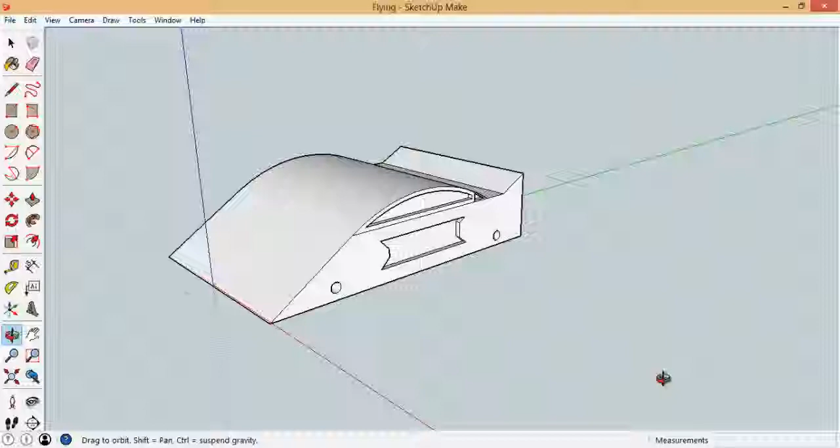If you've put your car together a little too early and you're not quite done with all the details, it's best to actually chop it back in half so you only have to do one side. Then once you're done you can copy the two halves together.

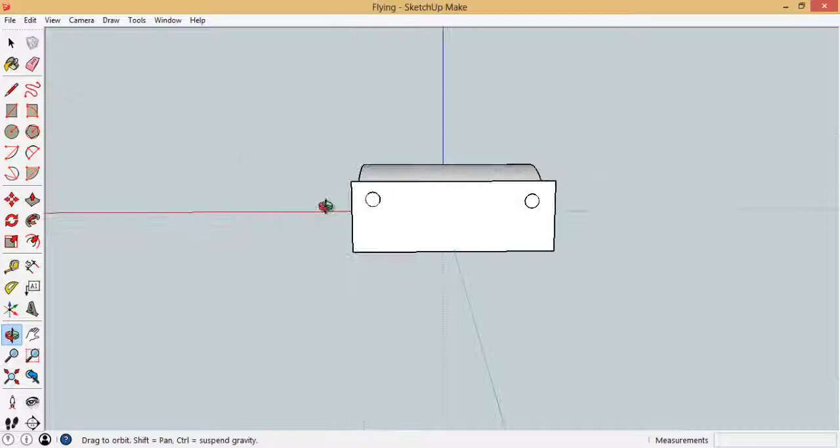So if I ask you to chop your car, here's what you need to do. Start with the line tool and find the midpoint on the front or the back of the car, it doesn't really matter, and draw a line going straight up. This is blue on the blue axis, meaning I'm going straight up and down.

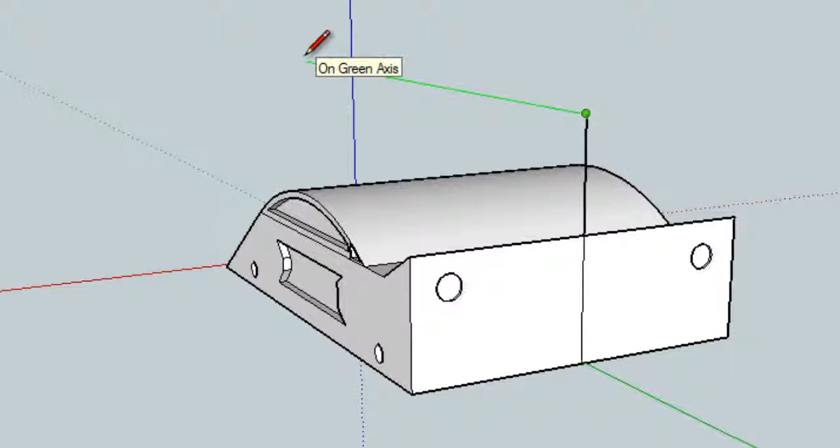Then draw a line going forward or back depending on wherever you started. This should be on the green axis, so you want to see a green line. If you want the line to snap to a certain location, you can show SketchUp where you want that to be by orbiting over and setting the mouse right where you want it to go.

I actually want this to go to the midpoint of the front of the car. Now as I pull the line up, when I get there it says 'from point.' So I showed the computer where I want it to go, and that way it's going to line up with that spot.

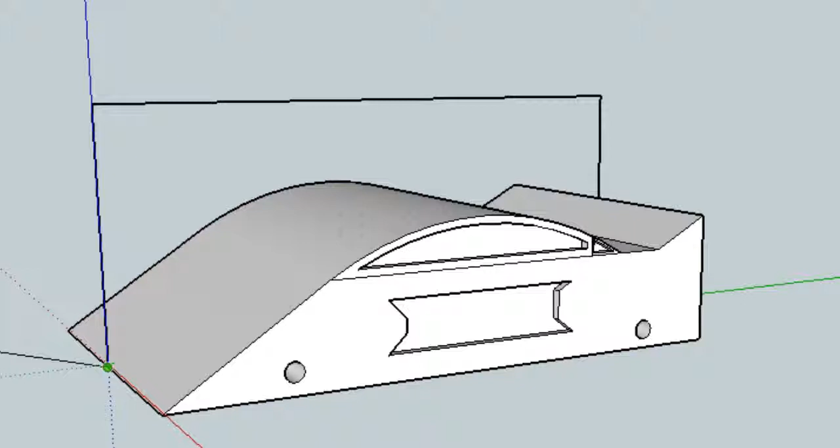Now I can draw a line down, again to the midpoint in this case, and then one more back to where I started. Once I draw a line all the way around, all four sides, that's going to create this piece that is going through the car.

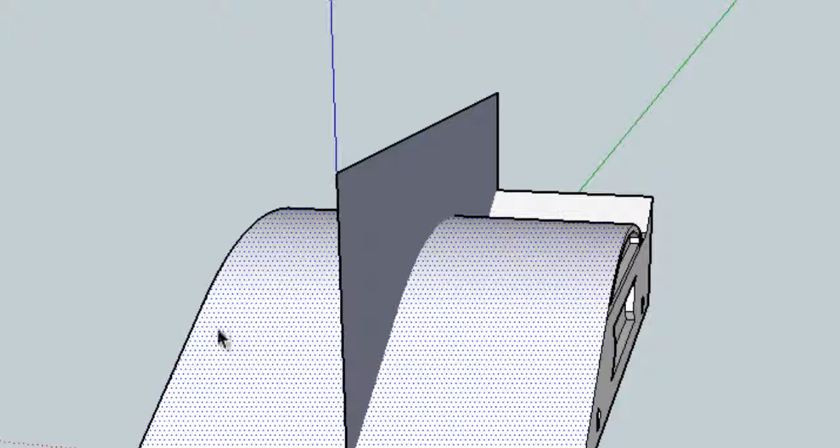Right now, the two halves are still connected, so when I click on one side, you see it selects both sides of the car. We're going to fix that by doing what's called intersecting the faces.

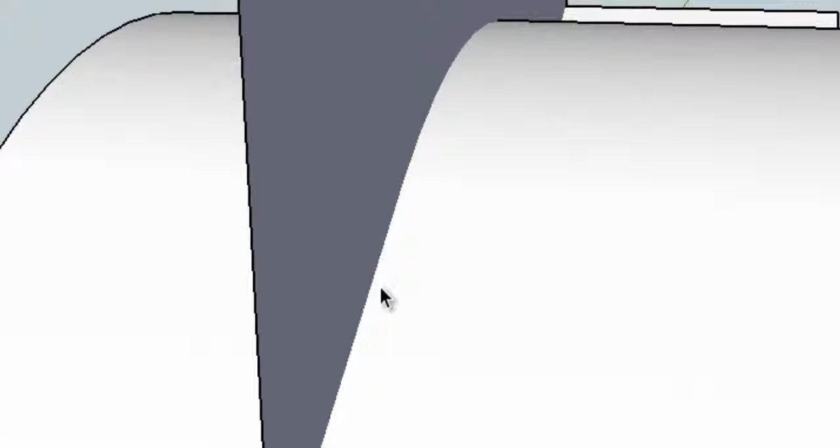If I right-click on this divider piece that we've added and go down to intersect faces with model, it's going to intersect or slice through the entire car. If you looked closely, before there was no line at this point, and now there is a line through there. So now we've sliced the car.

Now all we have to do is delete the pieces off of one side, and you can do that by just using the arrow tool and selecting everything. Make sure that your box does not cross over to the other side of the car — we're just working on one side.

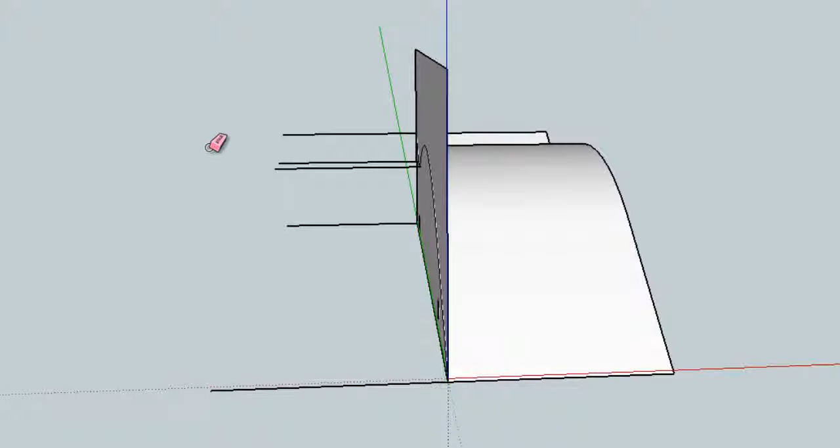Then delete. You may need to use the eraser to clean up a couple extra lines, and then you can erase the piece that we created. So now I'm back to just half of my car.

This would be really helpful if I ask you to work more on the details on the back or work more on the window or any sort of details. It's much easier to just do that one time on one side of the car, and that way when you copy and paste it, you know the two sides are going to be exactly the same.

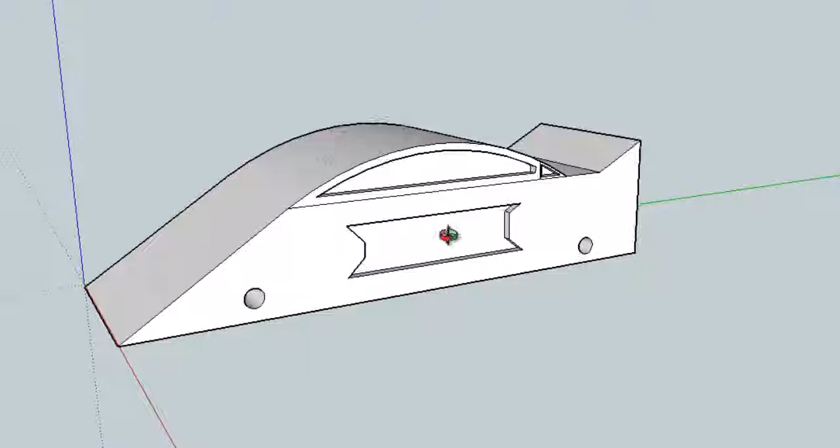The one place where that might not work is if you're going to add 3D text to an area. It's best to leave that off until after you've put the two sides together.